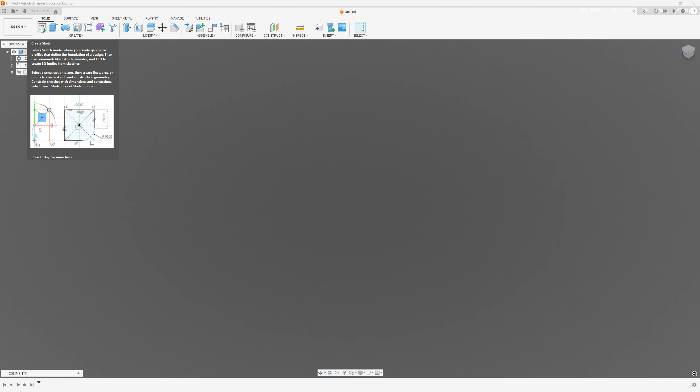We are going to, of course, start with a sketch. Select our plane. So I've selected the XY plane, and I'm going to do a 2-point rectangle. Click on origin, drag out. It is a 1-2-3 block, which obviously makes dimensioning really easy.

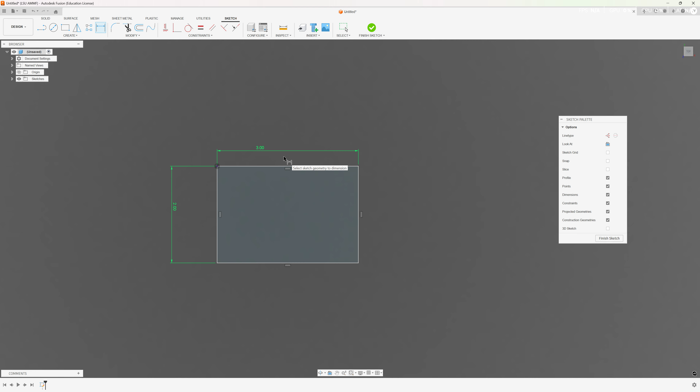I don't need to select multiple lines. Select one line, 2 inches, 3 inches, 3 inches, and we are going to automatically start putting our holes into our block before we do our first draft of it, or our first extrude of it.

So this side is going to have various through holes on it, so I'm going to start by putting down our first through hole. So these through holes are going to be a diameter of, let me look at my physical blueprint I have in front of me real quick. Let's see. C, which is 1/2 inch. So I'm going to select dimension and put in 0.5 for a 1/2 inch.

And it is going to be located a 1/2 inch in and a 1/2 inch over.

Now there are actually 6 of these holes arranged in, well, 2 rows, 3 columns, I think that's how it is. I don't know, I'm not an Excel person. So we need 6 of these holes in the block on this face. So I could manually go back to my circle in the upper left corner and select 3 more circles and then locate them each time, but that is going to be quite tedious.

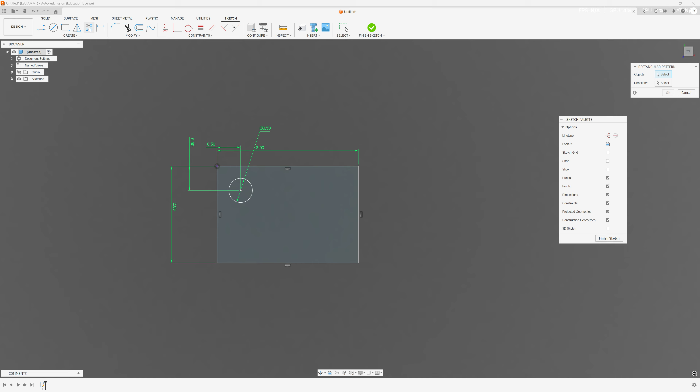So I'm going to select rectangular pattern. And then it's going to ask me to select what, and so I want this hole. So I want 3 circles this way, and I want 2 circles this way. So in this box right here, I'm going to put 2, and that is going to give me my dimension of 2.

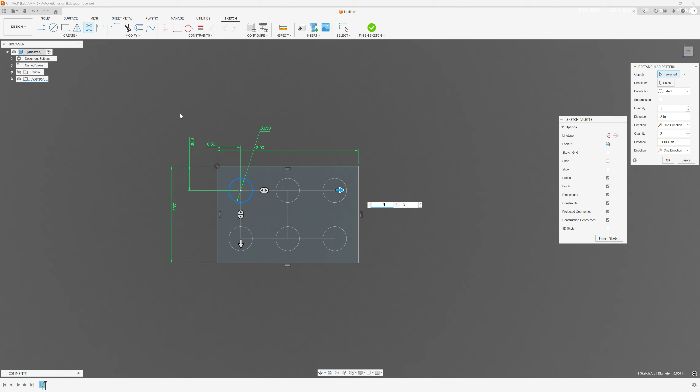They are going to be spaced 1 inch apart. So I've already got -1 because that's where our first line is going to be. And then for spacing this direction, they are going to be spaced at intervals of 1 inch apart as well, which means I need to bring this to 2 inches. So this is going to give me all 6 holes I need to drill in this block from this side without having to sit there and manually write out each hole. So that right here has created my 6-hole pattern.

So I need to do 2 more holes at a dimension, let's see, D, which is 375. So I need a hole here and a hole here. So I have manually drawn these holes in. Now, these holes, I could do another rectangular pattern where I just put a 3/8 hole, dimension it over, and then draft it over.

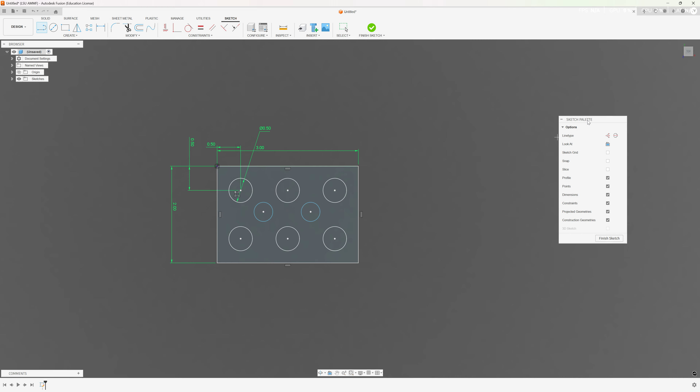Now I know this hole is going to be exactly in line between these holes, so the easiest way to do this is actually going to be using a construction line. So what I'm going to do is go in and select line, and then here in my sketch palette box, I am going to select construction. So this construction line is going to allow me to select this point, and it has drawn a dashed line. This is not a sketch line for an edge, but a sketch line for construction.

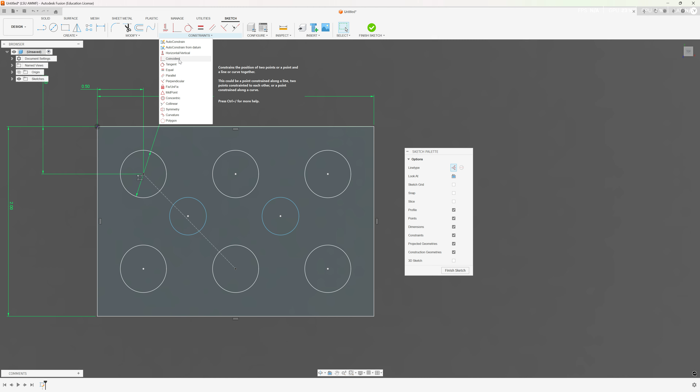And so now what I can do is select in my constraints a midpoint constraint. And then when I select my line and the center of this circle, it is going to affix the center of that circle to the midpoint of that line, which is going to be exactly the distance between these 2 points here. So I was able to locate this hole right here exactly where I wanted with using constraints only, and not having to use any dimensioning lines.

I usually find this better to use constraints over dimensioning because then it allows me to edit the sketch later easier. If I need to change something, since it is all based off of ratios, if I change the numbers that I have here, it will change the location of this circle automatically, which I find to be much better, especially in prototyping work where things are going to be changing a lot as new prototypes are brought out.

So what I need to do now is figure out what the diameter of this hole is. So I'm going to go up to sketch dimension. Let's see, on my physical print it says it is 3/8. So dimension 0.375. Now I have my dimensioned hole that is located where I need it to be.

Again, I like to use constraints as much as possible, so I'm going to use my equals constraint and make these 2 holes equal. Now I'm going to use another construction line to link these 2 holes together.

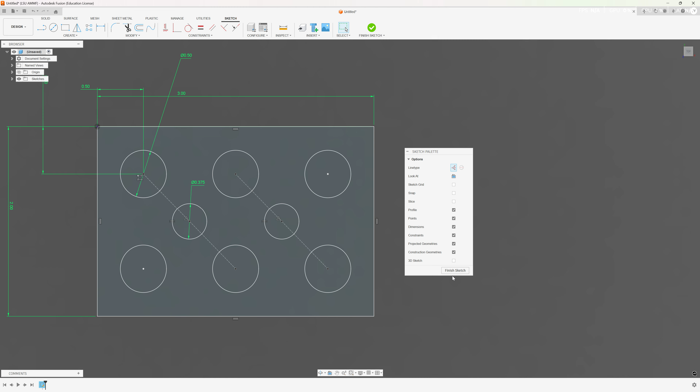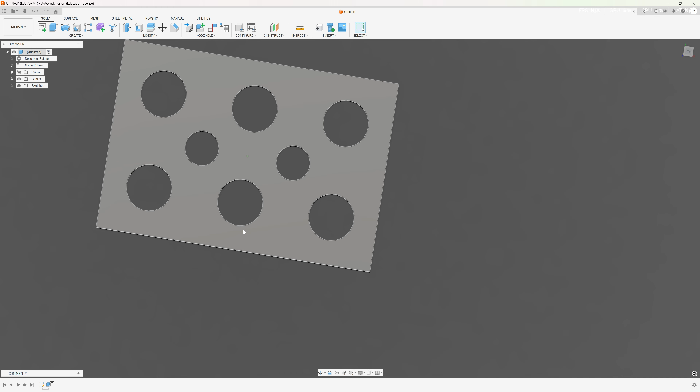From here, I'm going to extrude my block, so I can hit Finish Sketch, go to Extrude, or I could have just hit E for the hotkey. I'm going to select this plane because that's what I want to extrude, to a distance of 1 inch because it is a 1, 2, 3 block. Now I have the top face of my block almost finished.

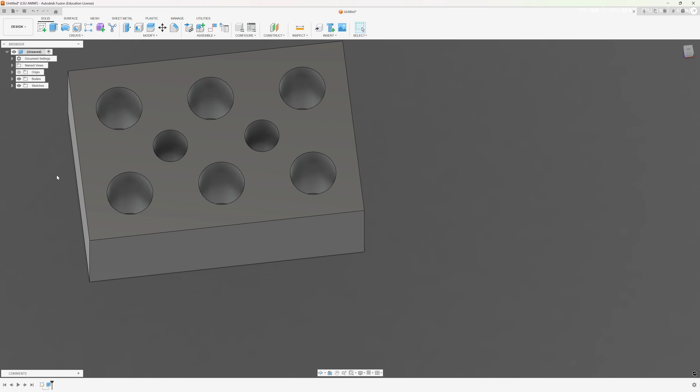Now anybody who's dealt with 1, 2, 3 blocks knows there's a lot more holes in here, but the rest of these holes are not through holes like what I've just drafted. They are actually going to be threaded holes. So for those, what I am going to do is draft my through holes onto this face.

The reason I'm going to do this is because I don't want to actually extrude these holes I'm about to draft, since I want to thread them. So what I'm going to do is select where I want all of these holes to be, and then join them with construction lines.

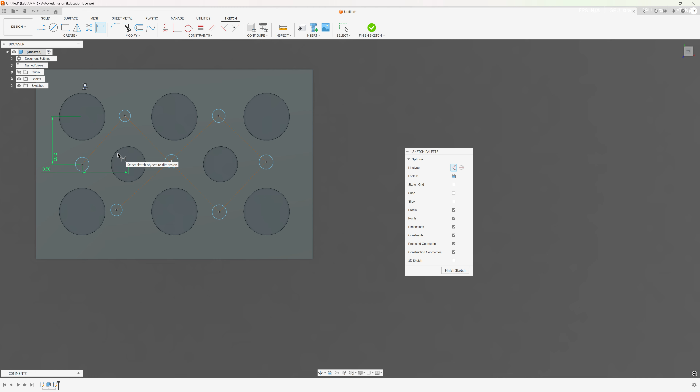I can now start dimensioning from this circle to the next: 0.5. From this circle to this circle: 0.5, to establish the location of my first circle. And then from there I can use constraints to establish this and this on the midpoint, as well as this and this on a midpoint. Five.

All right, and also dimension these holes. Let's see, 0.125 is fine, and now I'm going to do equals.

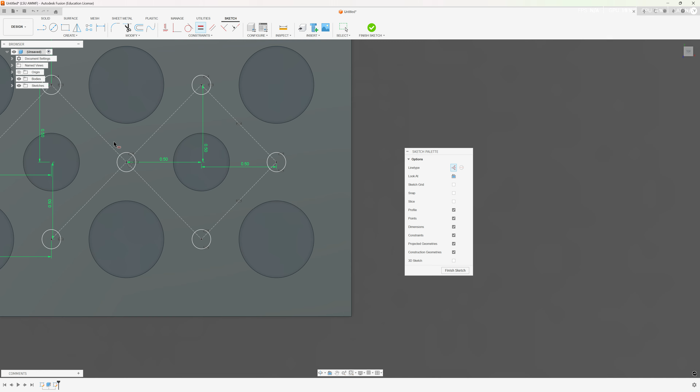So this is still blue, which means this one isn't fully defined. To figure out where it can move, I can just wiggle it around and it shows me. So for the last one, I'm going to do an equals constraint and make this line and this line equal, and it's going to establish that right in the center.

So with all of that, I have now my, what's that, 3, 4, 5, 6, 7 holes laid out that I need for my threaded holes, which are going to be 1/4 inch 20 UNC.

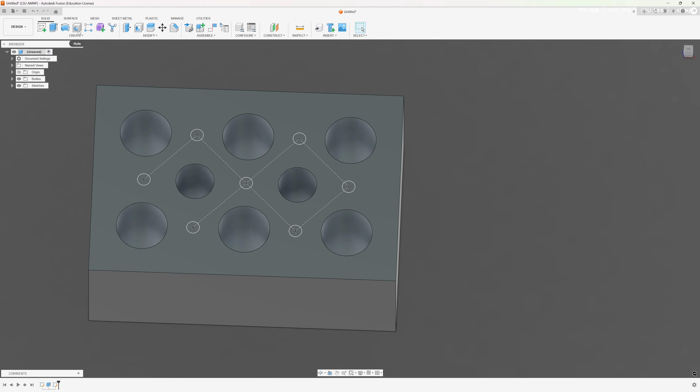Now I'm going to finish sketch and use my hole function up here in the upper left. So hole is going to allow me to select points, and I'm just going to select the center point of each hole. Even though I established these as 1/8 circles, it doesn't really matter, all I really wanted is that center point. So I've got my 7 selected.

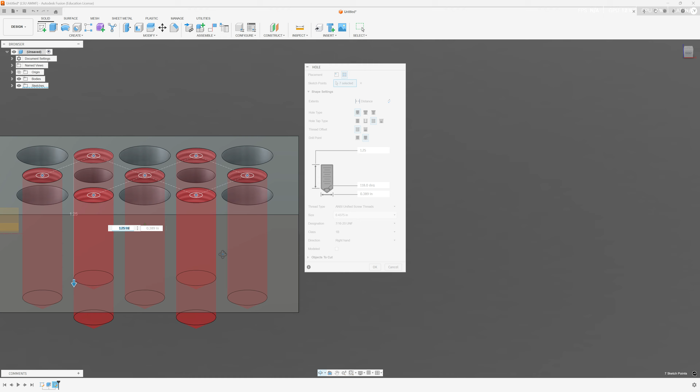Now for depth, I'm going to go to 1.25, which is going to be through, which is what I want all the way through. And for size, I am going to select 1/4 inch, 1/4-20 UNC, and the print calls for 2B right-hand threads. So this is going to establish those 7 holes as threaded holes all the way through. I can hit OK.

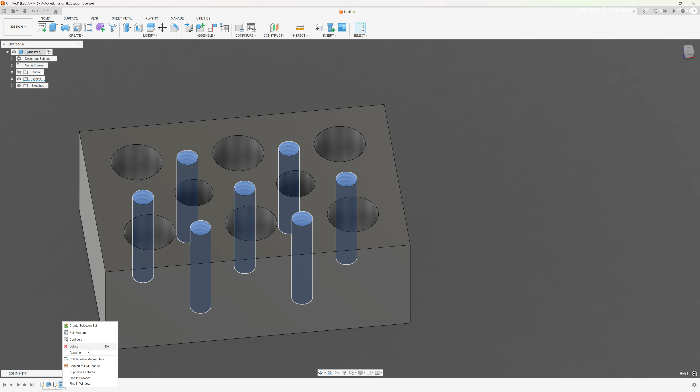So now I have established threaded holes. Again, as I've shown in my other videos, the next thing I'm going to do is select this down here in my workflow in the lower left, and then rename that to 1/4-20 tap hole. That way, I know that I am going to be tapping these 1/4-20.

And if I use the inspection tool in the top middle up here and inspect that hole, it is going to give me a dimension of 0.202 inches, which is going to be my tap drill size for the 1/4-20 hole.

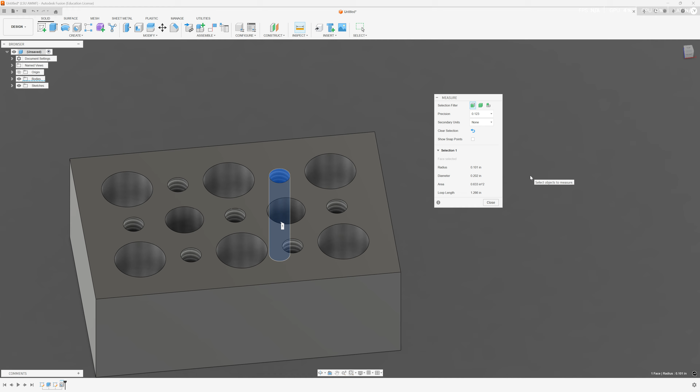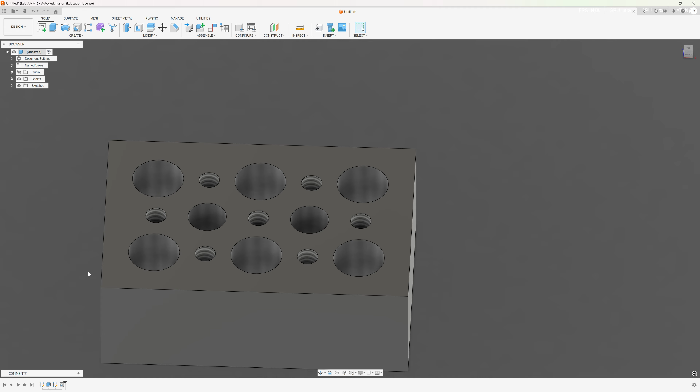So that is why I'm going to use the hole function over just a straight extrusion. With the cosmetics, I know that that is where I'm going to be establishing a threaded hole, and then I can check in my workflow to see exactly what size that is. It again helps eliminate confusion, and that's the whole point of drafting parts, is to help eliminate confusion when explaining these things to other people.

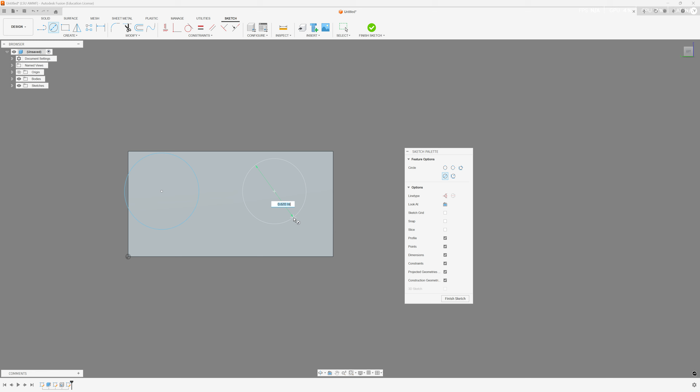Alright, so now if you ever use 1, 2, 3 blocks, you know that all sides have holes through them, so we're not done yet. We're going to establish another sketch on this end now. Once we're here, we're going to put 2 1/2 inch holes, 1, 2. We're going to go 0.5, and then I'm going to use the equals constraint to make those equal.

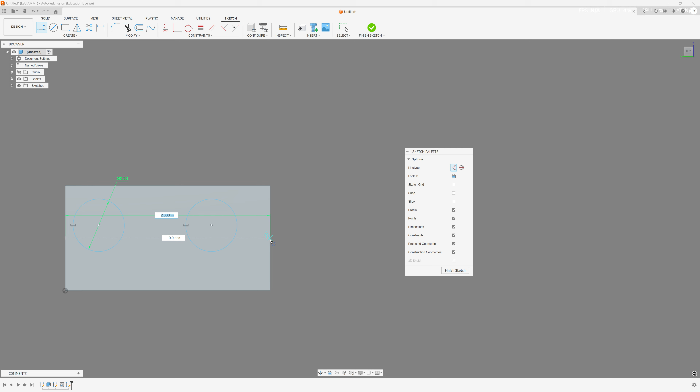Sometimes it's hard to see those holes, and I can't figure out how to make them darker sometimes, or those lines. So I'm going to use a line and a construction line. As I hover over this edge, it's going to show a triangle appear, meaning a midpoint is there, so I'm going to select midpoint to establish that line.

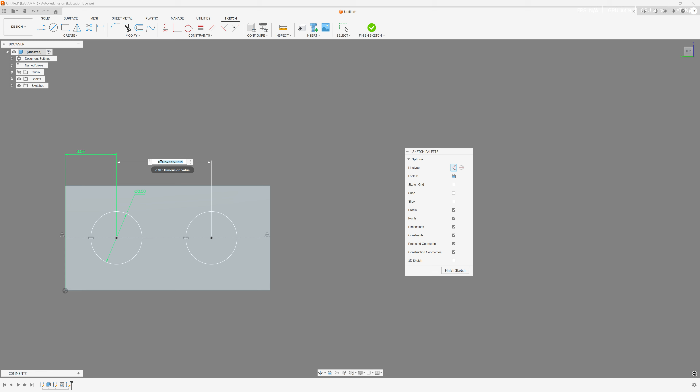Then I'm going to use coincident and say that the center of this circle is coincident with that line, and the center of this circle is coincident with that line. Now I just need to use my sketch dimension tool to establish the distance between these holes, which will give me my 2 1/2-inch extruded cut holes.

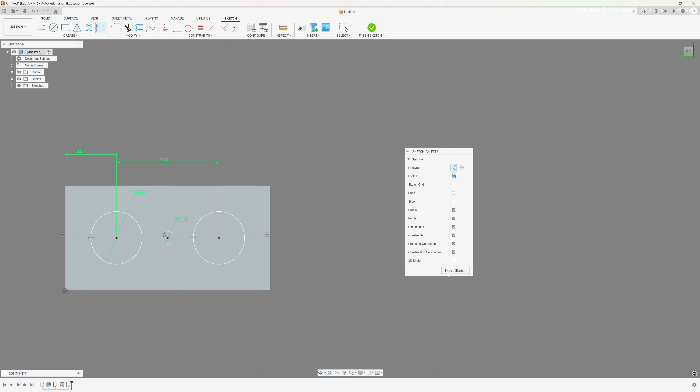But I'm going to add one more thing. I'm going to add another circle right here, and keep it as a construction line, because this is actually going to be the point where I do my next tapped hole all the way through. So I'll add that to this sketch. As far as sketch dimensioning, it doesn't really matter what this dimension is, because it's just a placeholder point. So I'm going to hit finish sketch.

First thing I'm going to do is extrude. Now I'm going to select those two, and just drag all the way through. It automatically selected operation as a cut, which is what I want, so I'll hit OK. Now I have my 1/2-inch holes extruded through my 1, 2, 3 block.

I am, of course, missing that threaded hole. It's not there anymore, because the sketch has disappeared since I used it. So I'm going to come back to the upper left in my dropdowns, drop this down, and show sketch. I'll hit the eyeball to show the sketch again.

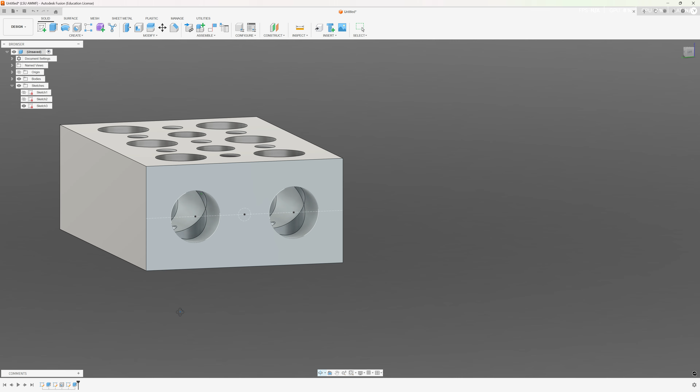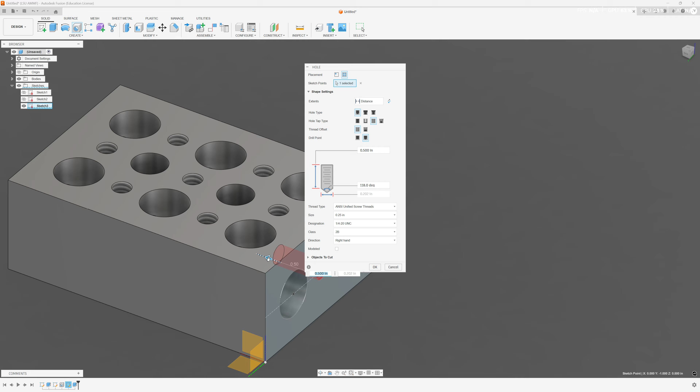There's my point back. Now I'm going to use the hole function, select that point, and again use a 1/4 inch, 1/4-20 2B right hand thread. It automatically loads in the last thing I used in this print, the 1/4 inch 20, so that's good. All I need to do is select the depth, and that hole is going to be all the way through, so I'll just click and drag. And OK, there's my threaded hole all the way through.

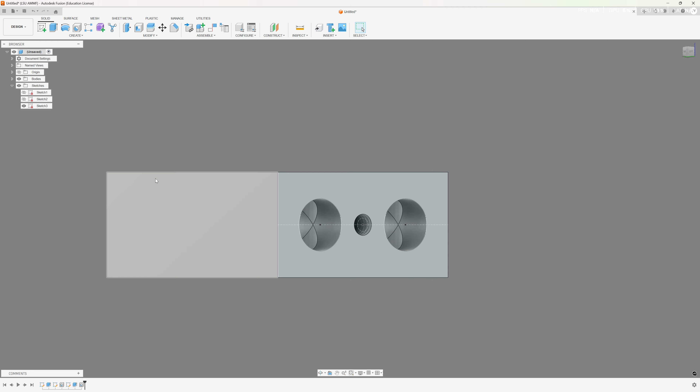Now the last one I need to do is on this side right here. I'm done with this sketch, and it doesn't need to be revealed anymore, so I'll click to hide it. Create sketch, select this face, and now I'll draft one circle here. I'm going to dimension it 0.5. I already know the location of it - it's going to be 0.5 over, 0.5 down.

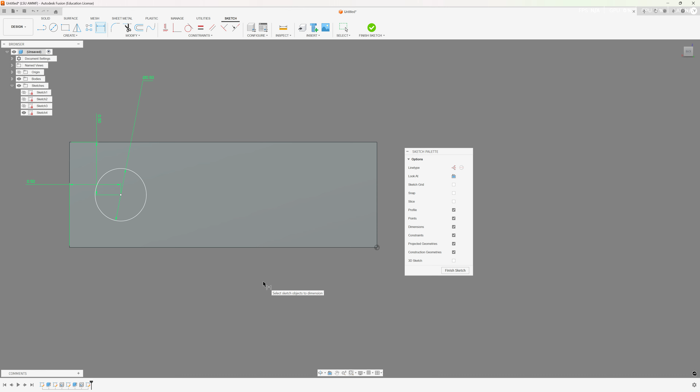Now for the other side, I manually drew out two circles and labeled them, because it was quicker to do it that way rather than using a rectangular pattern. But sometimes you just got to decide what's going to be quicker - is it quicker to manually input the dimensions for each hole, or is it quicker to do a rectangular pattern? For this, I'm going to go ahead and use the pattern function.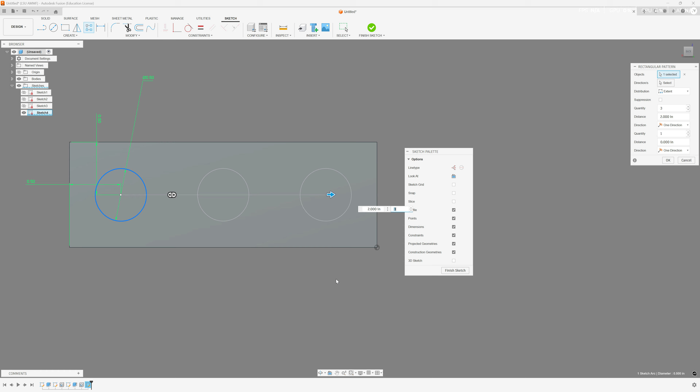So bring it to 2, that's going to be my 3. All right, so those are 2 inches overall, which means I'm going to have 1 inch between each block. So that's going to be my 3 holes on this side, and now I have my threaded holes, which I'm going to add in manually right here, 0.25. Actually, I've been going 1/8 - I'll keep doing 1/8.

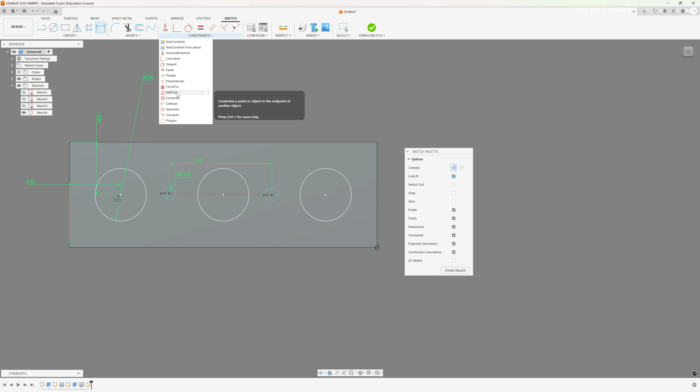Equals - those are equal to each other, and now what I need to do is create a line in the upper left, a construction line, and link these two. The distance between them is going to be 1 inch. Then I'm going to use a midpoint function in my constraints to make this midpoint on that circle, and then use horizontal vertical to put them in line. And just like that, I have everything lined up as it needs to be.

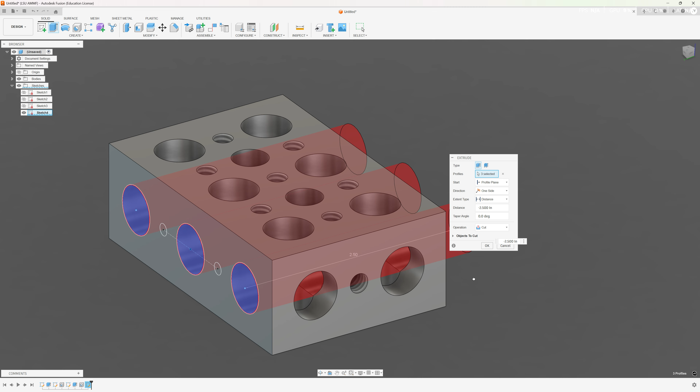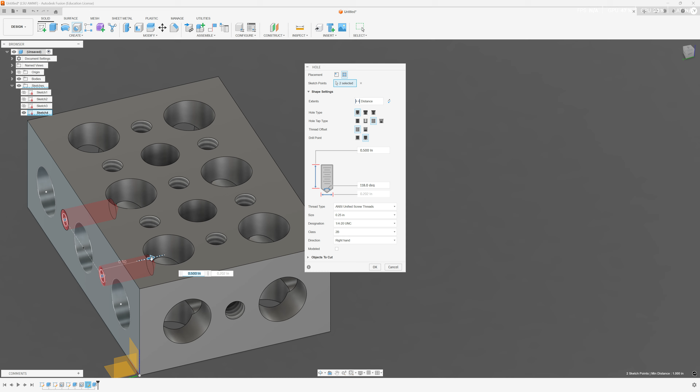So I can now finish sketch, hit E for the hotkey to extrude, select the 3 through holes, and extrude those, drag to make the cut through, hit OK. Again my sketch disappeared, so I'll reveal that again by clicking the eye in the dropdown on sketch 4, hole function in the upper left, select those 2 points, drag all the way through, check it - it is 1/4 inch 20 still, 2B, okay, and I can hide that sketch now. Just like that, I have drafted a 1, 2, 3 block.

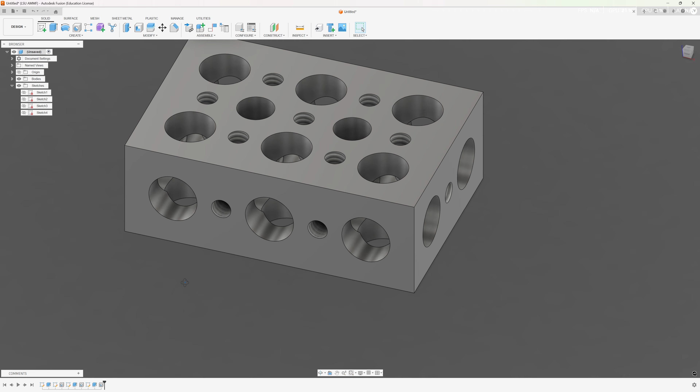So this is an excellent project for learning how to set up drills and taps if you're learning how to machine, but it's also an excellent source on how to learn the sketch function for patterning. Hopefully that was helpful. It was a relatively shorter video than the rest, but hopefully you learned something, and good luck, have fun.